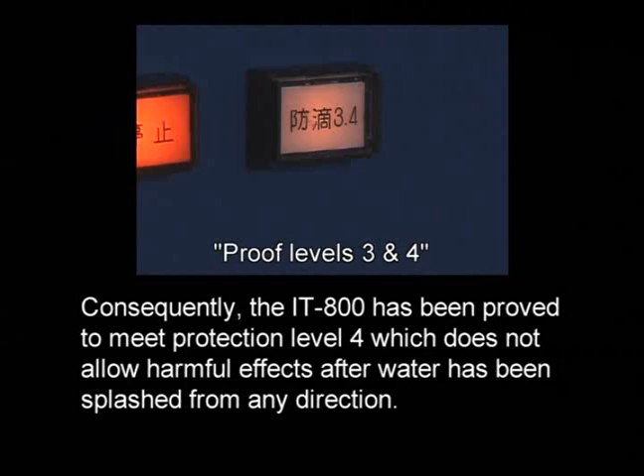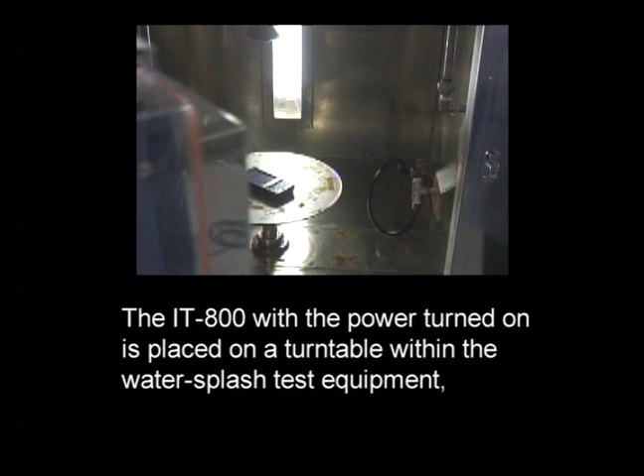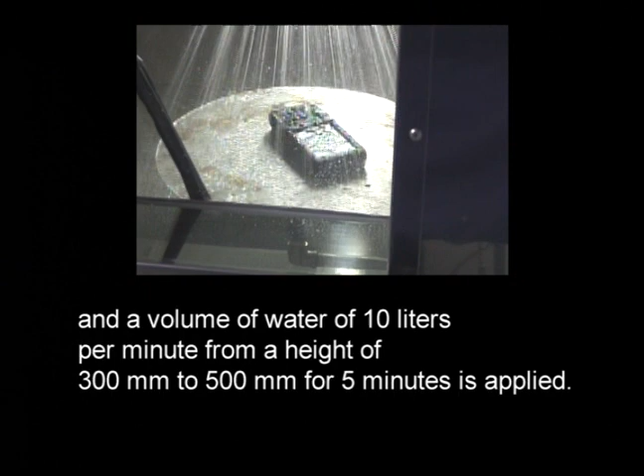The IT-800, with the power turned on, is placed on a turntable within the water splash test equipment, and a volume of water of 10 liters per minute from a height of 300 to 500 millimeters for 5 minutes is applied. During this period, the precipitation pressure is set to 50 to 150 kilopascals.

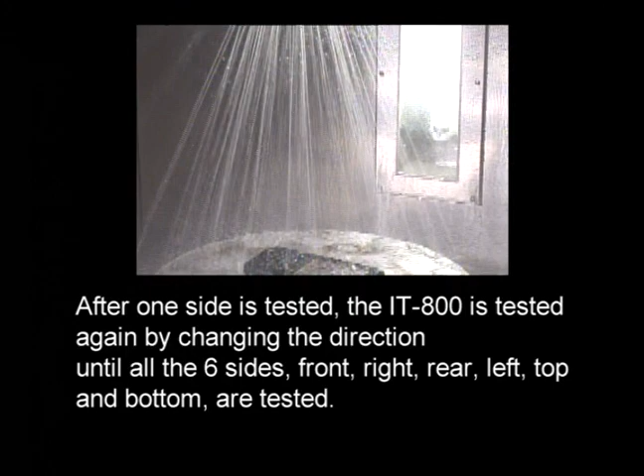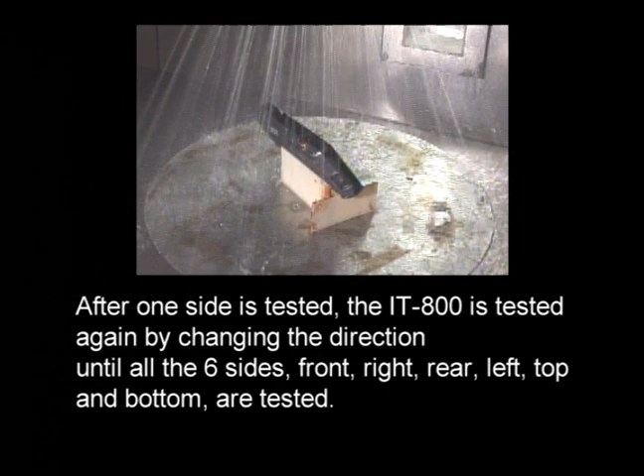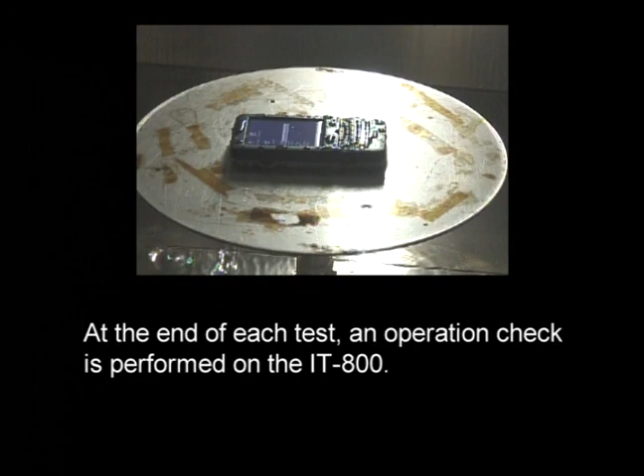After one side is tested, the IT-800 is tested again by changing the direction until all 6 sides—front, right, rear, left, top, and bottom—are tested. At the end of each test, an operation check is performed on the IT-800.

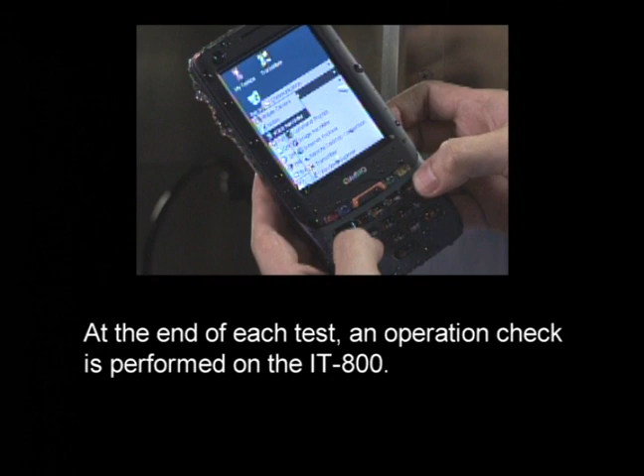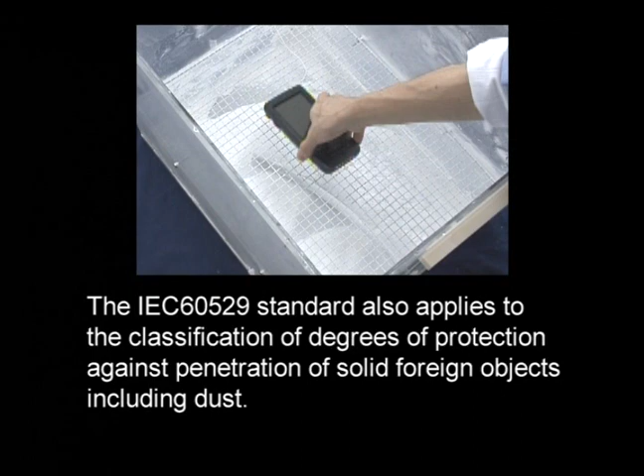Dust Proof Test. The IEC 60529 standard also applies to the classification of degrees of protection against penetration of solid foreign objects, including dust. The classification of degrees ranges from 0, non-protected, to 6, dust-tight, the highest possible rating.

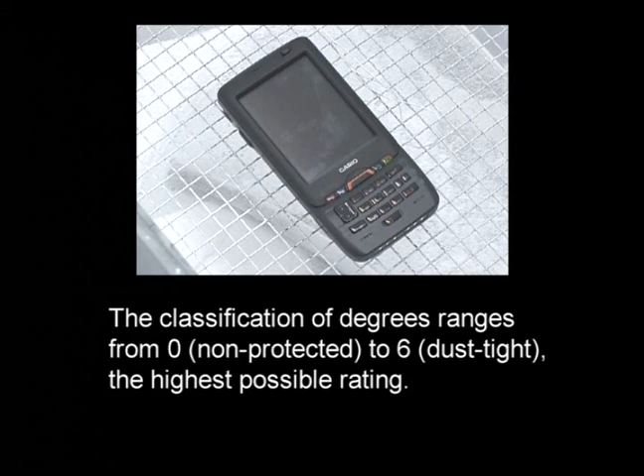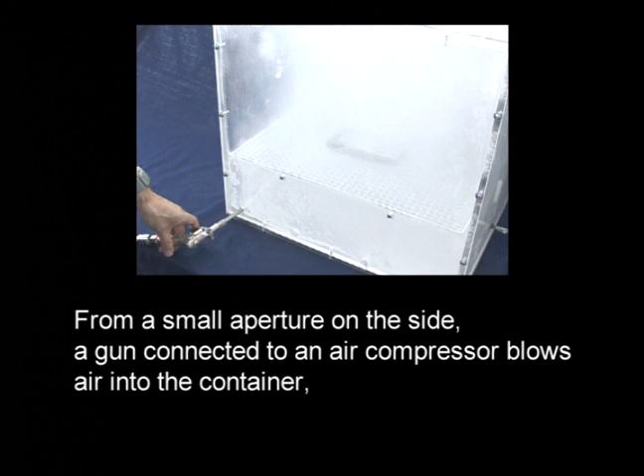The IT-800 is firstly placed in the center of an airtight container. From a small aperture on the side, a gun connected to an air compressor blows air into the container to fully distribute white-colored, fine powder, talc with a grain density of 2.7 grams per cubic centimeter, which is initially resting in the bottom of the container.

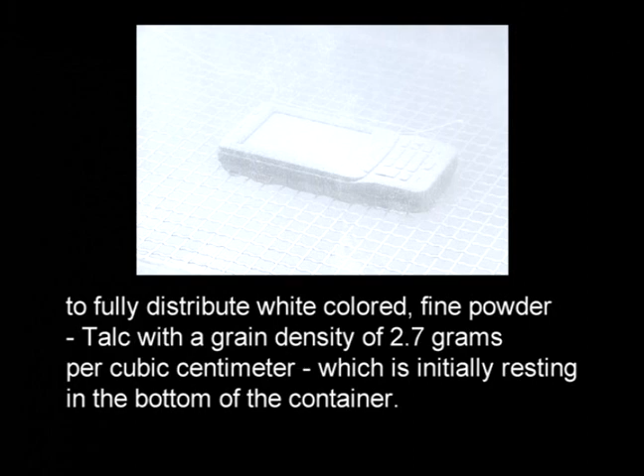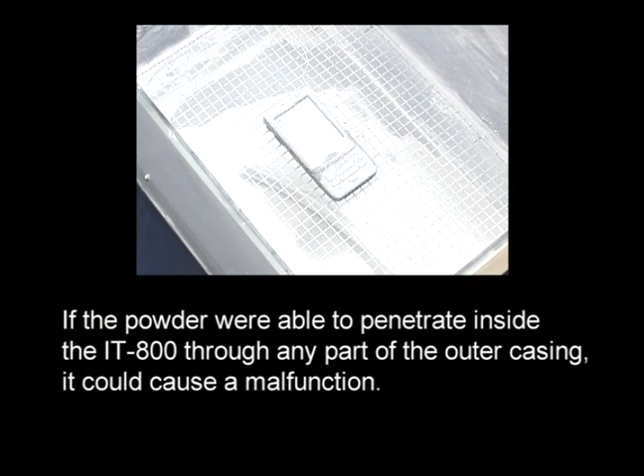Once this operation is complete, the container is tightly closed. It takes nearly 1 hour for the powder to settle on the bottom of the container and over the IT-800. If the powder were able to penetrate inside the IT-800 through any part of the outer casing, it could cause a malfunction.

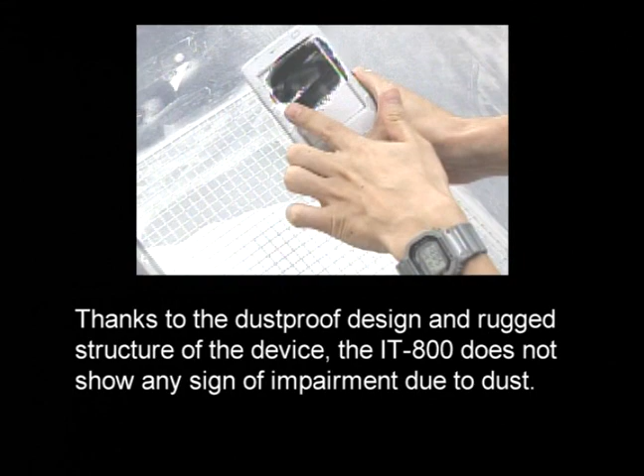Thanks to the dust-proof design and rugged structure of the device, the IT-800 does not show any sign of impairment due to dust. This proves that the IT-800 meets the criteria for protection against dust, dust protected, which equates to IP code 5.

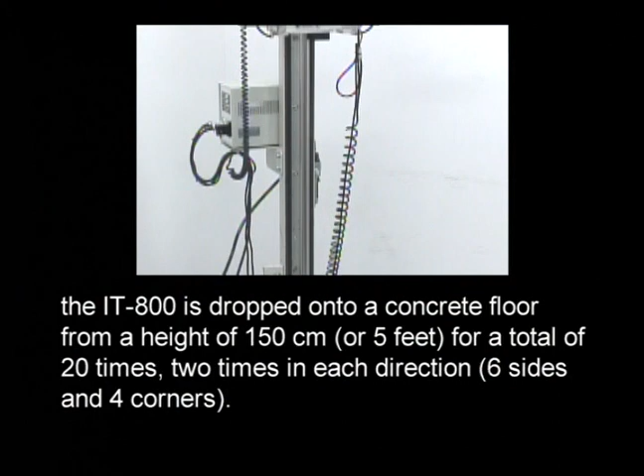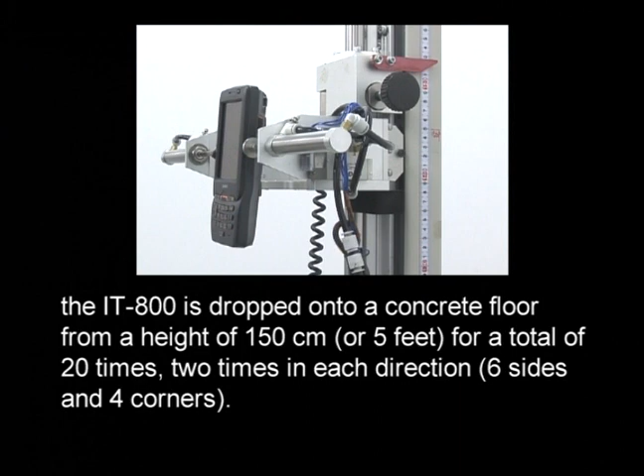Drop Durability Test. To ensure the drop and impact durability of the device against harsh handling in its service life, the IT-800 is dropped onto a concrete floor from a height of 150 centimeters, or 5 feet, for a total of 20 times—2 times in each direction, covering 6 sides and 4 corners.

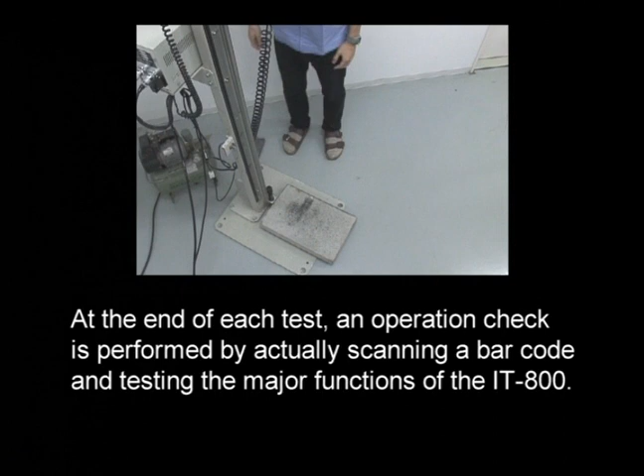At the end of each test, an operation check is performed by actually scanning a barcode and testing the major functions of the IT-800. After 20 drops to concrete, the IT-800 is considered to have passed the drop durability test.

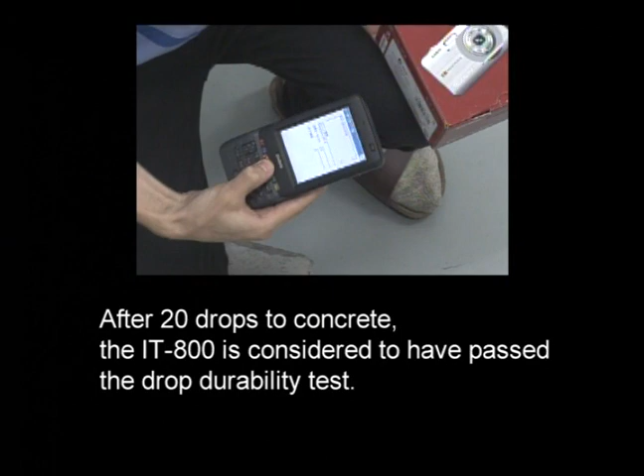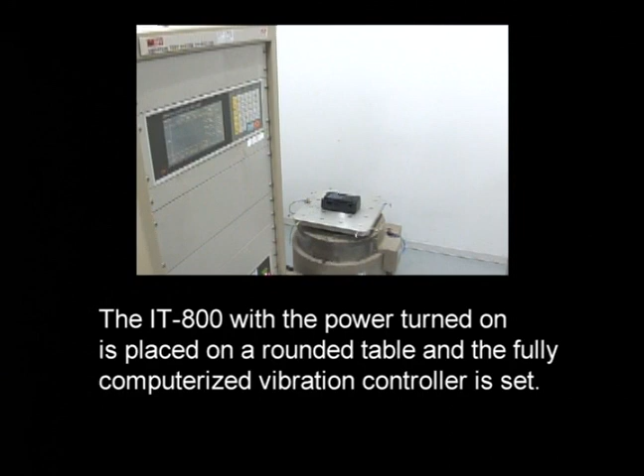Vibration test. The IT-800, with the power turned on, is placed on a rounded table and the fully computerized vibration controller is set.

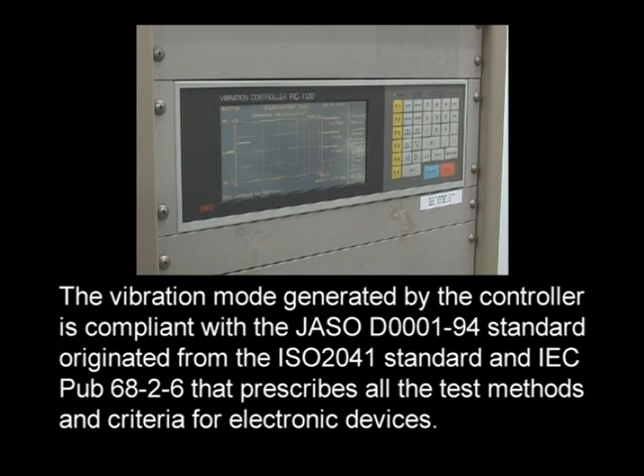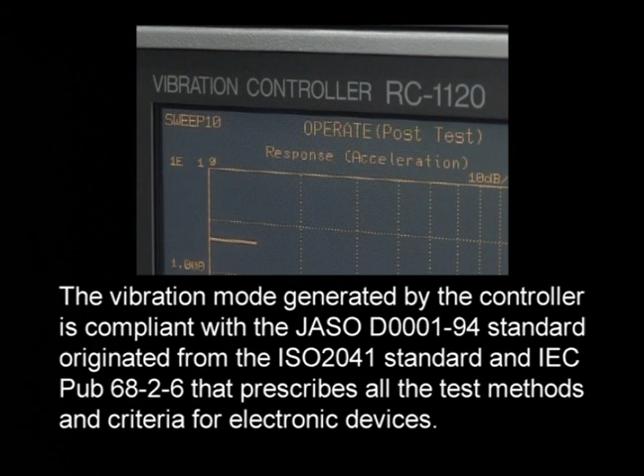The vibration mode generated by the controller is compliant with the JASO D0001-94 standard, originated from the ISO 2041 standard and IEC publication 68-2-6, which prescribes all the test methods and criteria for electronic devices.

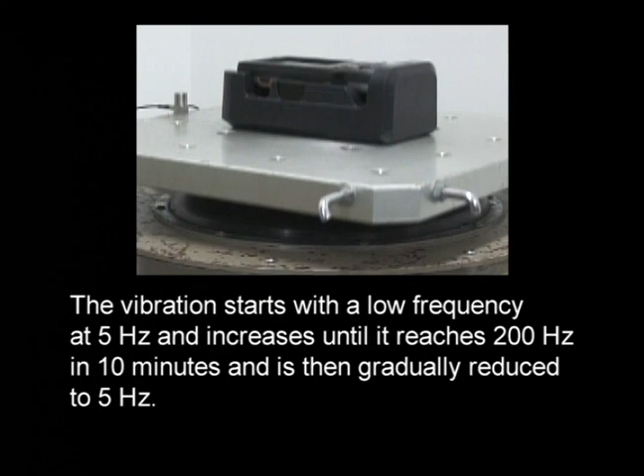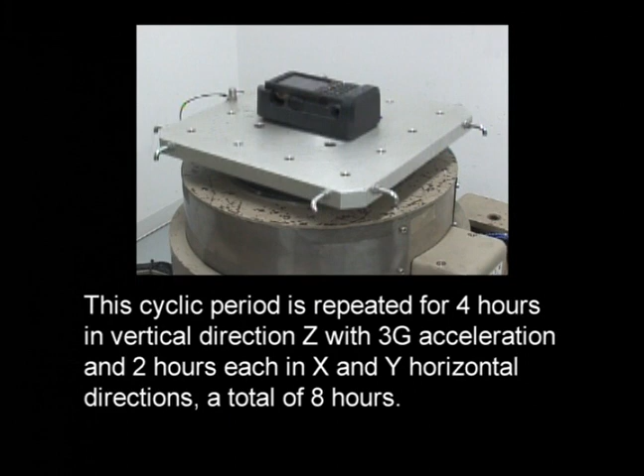The vibration starts with a low frequency at 5 Hz and increases until it reaches 200 Hz in 10 minutes, then is gradually reduced back to 5 Hz. This cyclic period is repeated for 4 hours in the vertical direction Z with 3G acceleration, and 2 hours each in the X and Y horizontal directions, a total of 8 hours.

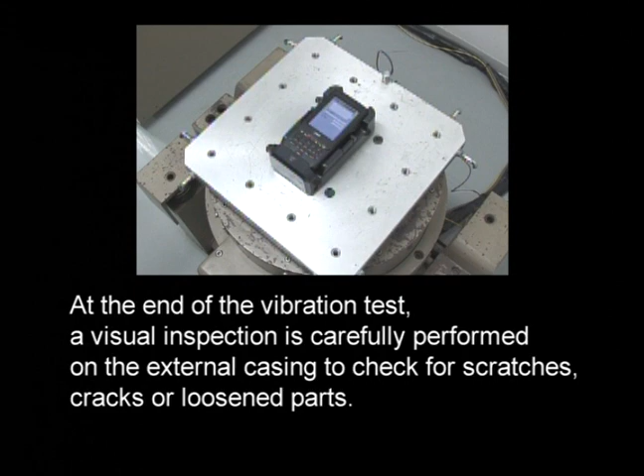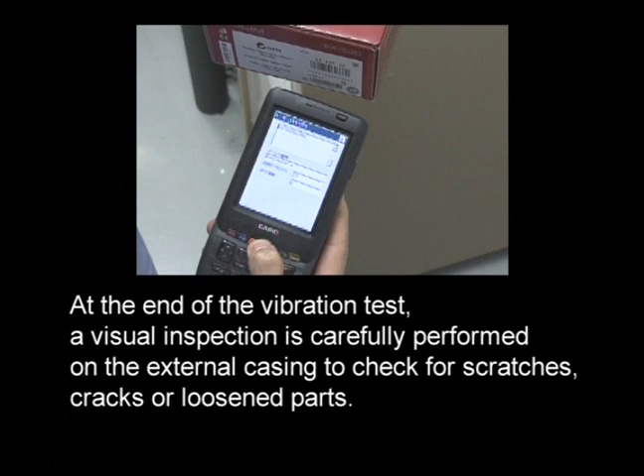At the end of the vibration test, a visual inspection is carefully performed on the external casing to check for scratches, cracks, or loosened parts. All major functions, including scanning barcodes, must be performed without any error.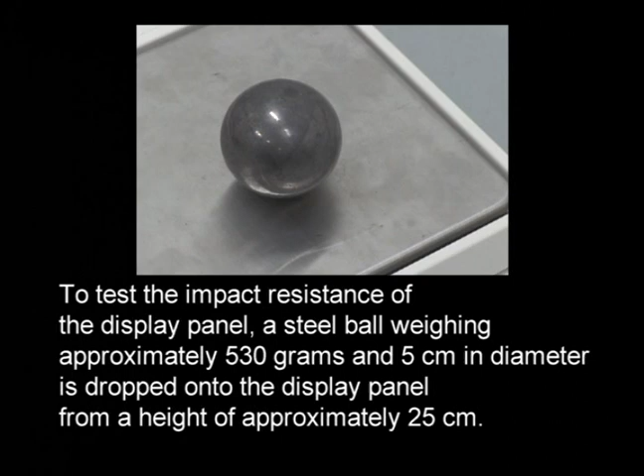Display panel impact test. To test the impact resistance of the display panel, a steel ball weighing approximately 530 grams and 5 centimeters in diameter is dropped onto the display panel from a height of approximately 25 centimeters.

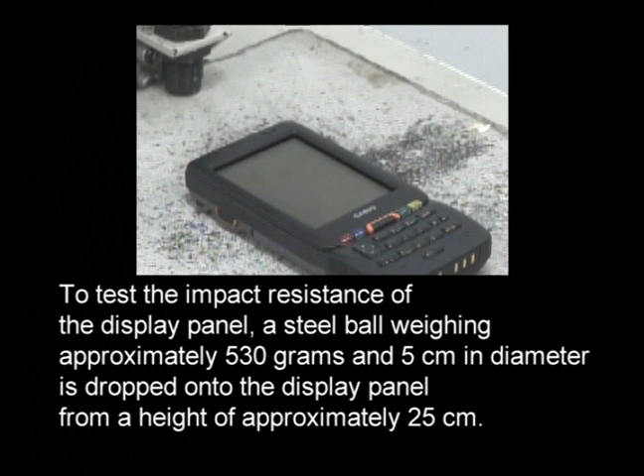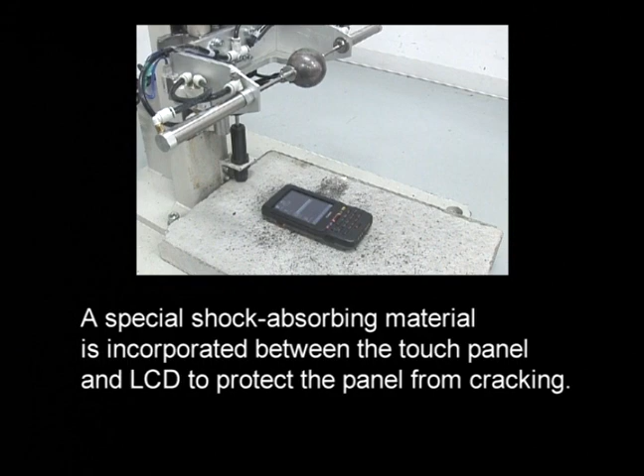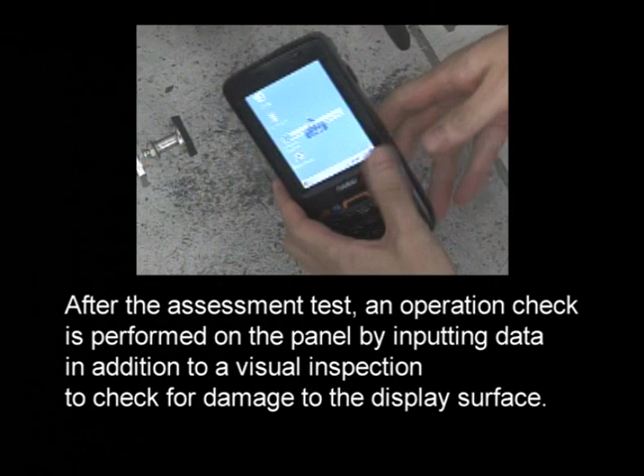A special shock-absorbing material is incorporated between the touch panel and LCD to protect the panel from cracking. After the assessment test, an operation check is performed on the panel by inputting data, in addition to a visual inspection to check for damage to the display surface. This is the most rigorous and absolute assessment test ever applied in the history of the LCD panel.

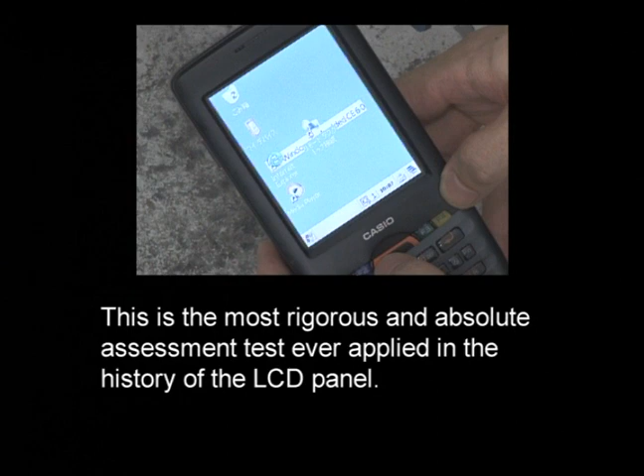Powerful, flexible, rugged IT-800 series.